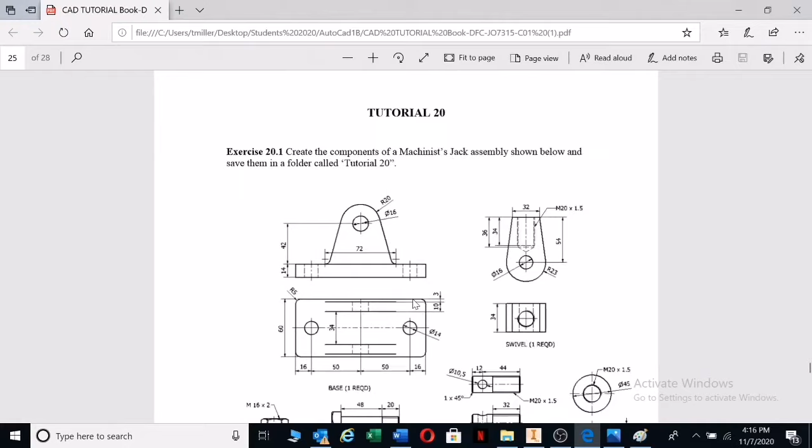I have print screened this picture from the file here, you can see, and pasted it in Word, and from Word I saved it as a picture, and then I opened it with Paint, and then in Paint I can explain to you guys better by just showing an illustration of how it fits together. It won't be perfect, but it will give you guys an idea.

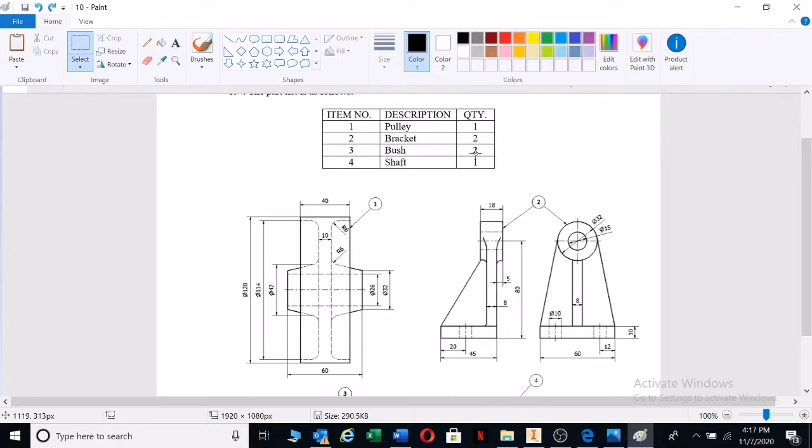Right, what we do have here is the pulley, the bracket, the bush and the shaft. There's two brackets, there's two bushes, so we have two of these. It's obvious that these two will be opposite to one another, and we have two bushes. This is how you start looking at an assembly drawing.

Component number one, you go look at what diameters component number one has. But you only look at the holes. There we have a diameter of 32, so we don't care about that diameter because it's not a hole or a shaft. There we have more diameters, we don't care about any of those. We only care about the 26 because we have a hole there.

Let's go locate what fits inside the hole. Let's go look at 26 millimeter in diameter. We're not going to look at this because that's a hole going through there, so we can't fit holes with holes. So we need to look at shafts. Going downwards, I can see that there we have a bush, and they say there are two of these bushes. We've got a diameter of 26, which is very important. That's the shaft of the bush on the outside.

But the bush also has a hole. So we've got a 20 diameter hole going through, and we've got a 26 millimeter shaft. Since that is a hole and that's a shaft of 26, we know that these will fit together. So what I'm going to do is highlight this quickly, and I'm going to copy it, right click, paste, and I'm going to take this bush and put it in there.

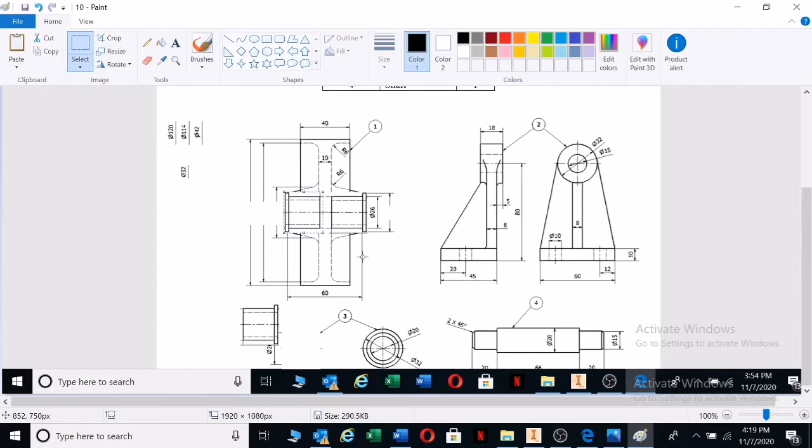Okay, that's what we have. So this has become one component. Let me just delete it. That is no more part of the drawing, and that's done. So that has become one component now. It's done. And the only thing that can be altered on this component is the 20 millimeter diameter on the inside that I showed you.

So let's go further. We know that that's a hole. It can never match up with all these holes. So the obvious thing is the shaft. We need to look for a diameter of 20 millimeters, and on the shaft we have a diameter of 20 millimeters. The 20 millimeters is 66 millimeters in length, and we have 20 on both sides. So we're having a width here of 60, and then a width there of 66, which this will sit inside the center, and we will have 3 millimeters sticking out there and 3 millimeters sticking out there.

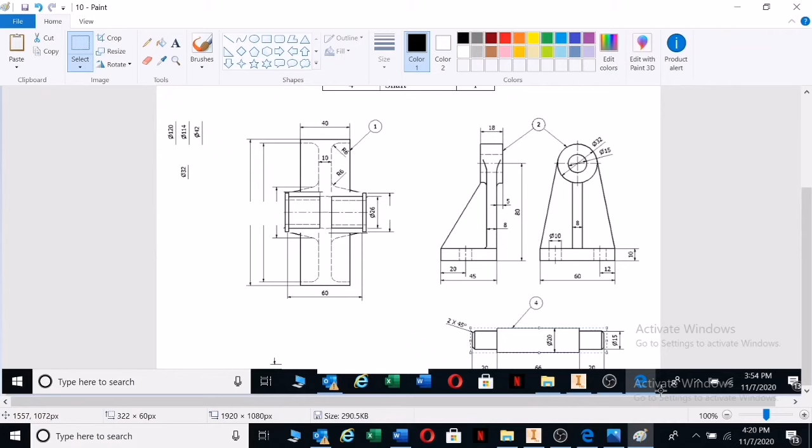So let's highlight this quickly. We know that the shaft will fit through there, through the bushes, and the 3 millimeters will stick out. There it shows a little bit, but before we do that, I want to just connect the brackets. There's my first bracket there. I know that I'm having a diameter there of 15. There's the 15, and that diameter is 15. There's two of these brackets, and I know they have to be on both sides. So let's highlight this bracket.

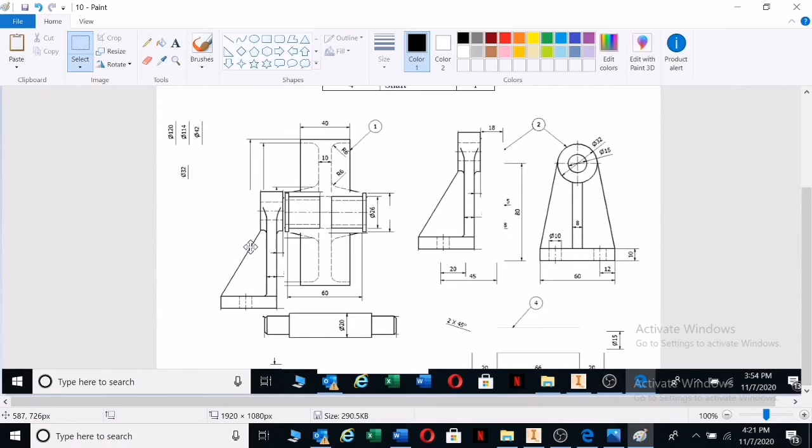I think for me, let's start here at the bottom and go upwards. Okay, there we've got the bracket. Right click, copy, right click, paste, and I'm putting my first bracket right there, because the shaft still sticks out 3 millimeters, so there has to be a gap there. And I'm going to paste another one, and I'm going to right click on it and say flip horizontal, and it will go to the other side.

There we go. And now we know that the shaft will fit in the center. We can take the shaft as is, and there we go, there's the shaft. Now I know this looks like a little bit of a mess, but it gives you an idea how diameters can fit into one another.

Let's recap. Once you have holes, you look for shafts with the same diameter, and then you fit the holes, and if the diameter changes, you look for another shaft that can fit in there, and then you just go on like that, moving the holes into the shafts or the shafts into the holes, and then eventually by same sizes you'll get the right answer.

But based on engineering principles, I know that most of the time the bushes will go into the pulley, and then your brackets will be there to carry your shaft, and your shaft will go through the center of your bushes. A shaft will always go through your bush.

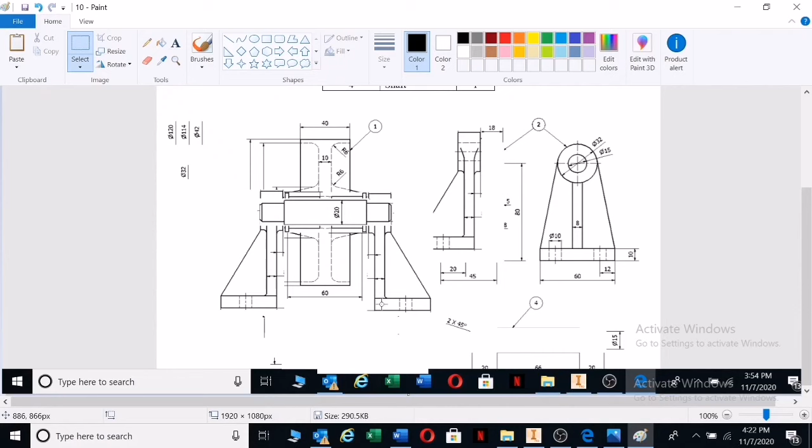Okay, thank you very much. That's a quick illustration. Let's do the next one.